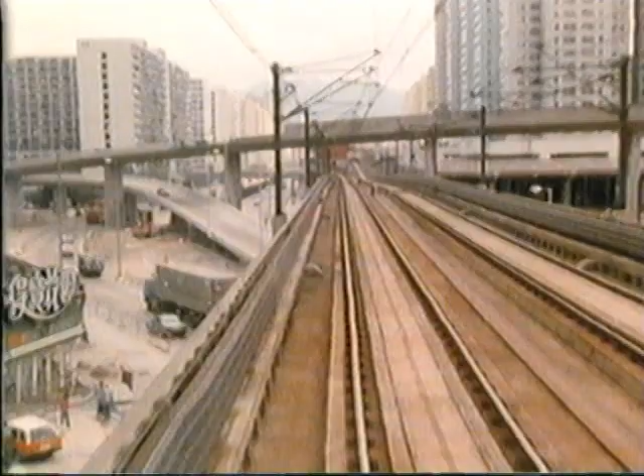This railway is considered one of the most efficient and up-to-date of its kind in the world. It moves more than 1 million people a day over a 26-kilometre track above and below one of the world's most congested cities.

For the people of Hong Kong, the mass transit railway has become an unparalleled asset. Journeys that used to take hours now only take minutes, and at affordable prices.

Commencing construction in 1975, the initial system stretched some 15.5 kilometres linking Hong Kong Island with the Kowloon Peninsula. But because of the territory's rapid expansion, this was lengthened to include an extension of some 10 kilometres. Then, in mid-1981, work commenced on the new Island Line.

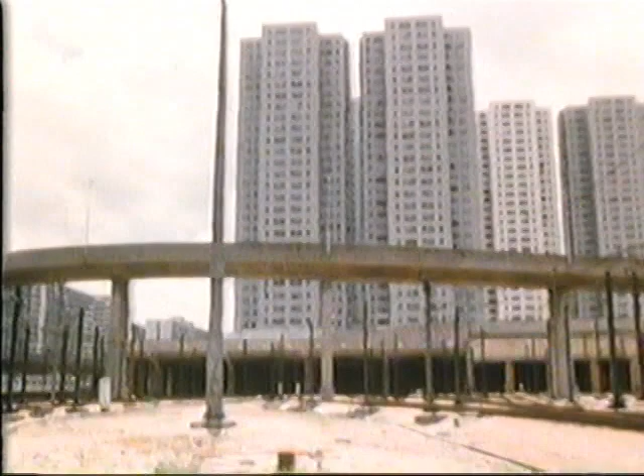One of the key elements in the railway's inception was that it should be financially viable, and to implement this, commercial complexes were established at key points along the line, one of these being the Kowloon Bay development, Telford Gardens. Numerous high-rise apartment buildings were erected, these being offered for sale with attractive incentives. This complex also houses some 100 shops, restaurants and recreational facilities, and has blossomed into a mini-city.

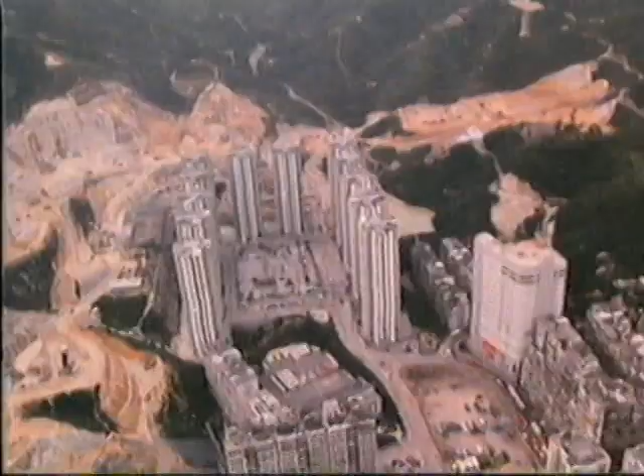This commercialization has been one of the railway's cornerstones for success, and the MTR has in a few short years become a veritable industry, what with its huge land development programs and smaller spin-offs such as station billboard advertising.

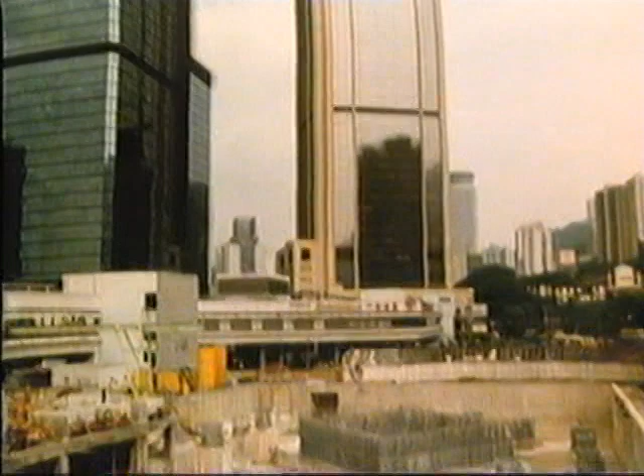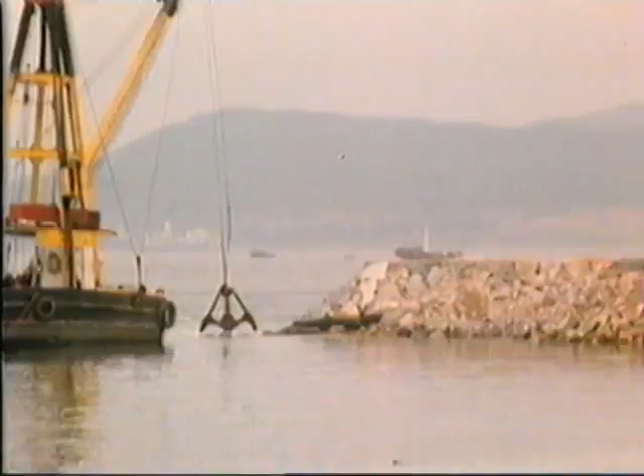While the mass transit was opening, the British company of Marples Ridgeway was establishing its presence in the territory. Their first contract was a bridge linking Kai Tak Airport and a hotel complex. The company then went on to complete foundation and advanced tunnelling work on the Admiralty Station complex, this being for a future high-rise development. And on the new Island Line, Marples excavated over 1 million tons of rock from a hillside, the fill being used for a land reclamation project.

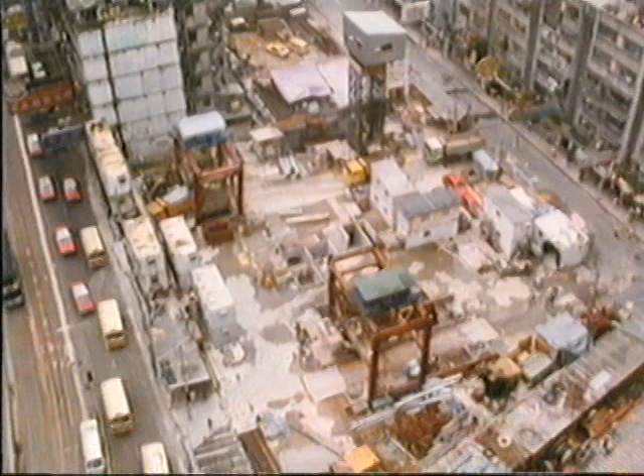Perhaps one of the most important associations Marples has had with Hong Kong's new Island Line is Causeway Bay Station, or Contract 430, tenders for this being invited in early 1982. Marples joined forces with LTA, the international construction consortium with extensive mining experience, and was successful in tendering for this contract. Not only was Contract 430 a complex civil engineering undertaking, but it had a very pressing completion date and liquidated damage clauses.

Both diaphragm and caisson walls were necessary around the periphery of the site, and within, 42 large diameter caissons containing the columns upon which the development would be erected. A road also runs through the site. It consists of 7 levels of subterranean structure, and eventually 2 high-rise developments will be built above it, and when complete the entire project will have cost nearly 1 billion Hong Kong dollars.

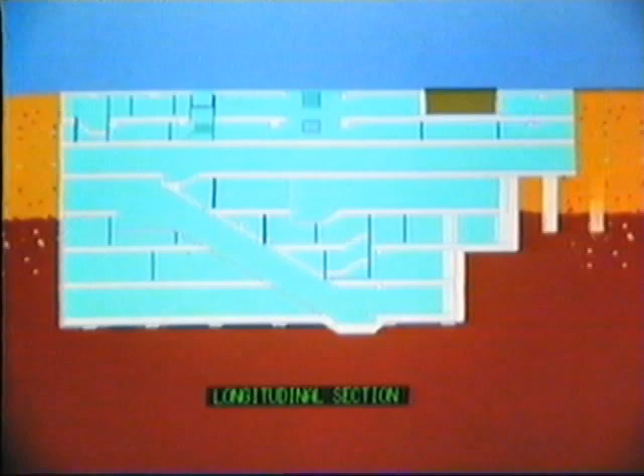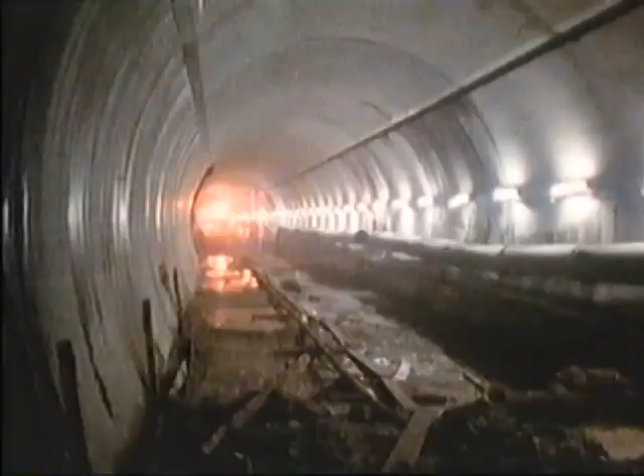The center points of the structure are large escalators to move passengers between the station tunnels below and the street level above. Also contained on the various levels are E&M and other MTR-related facilities servicing the station and running tunnels. Connection between the station tunnels and the complex is through a series of passenger adits built as part of the tunnel contract. When both Contract 430 and the tunnels are complete, they'll become an integral unit with easy access to a shopping complex and the street level above.

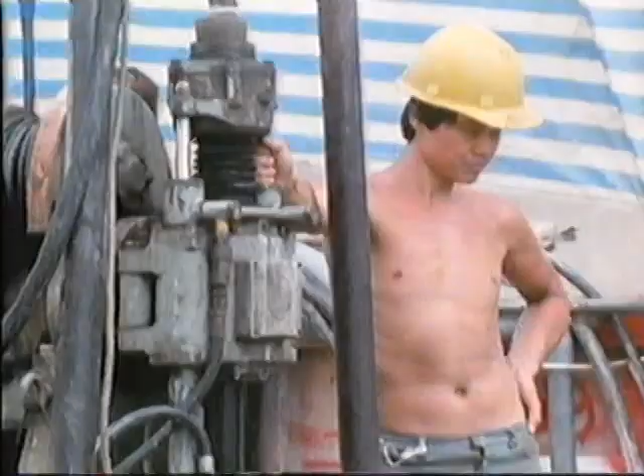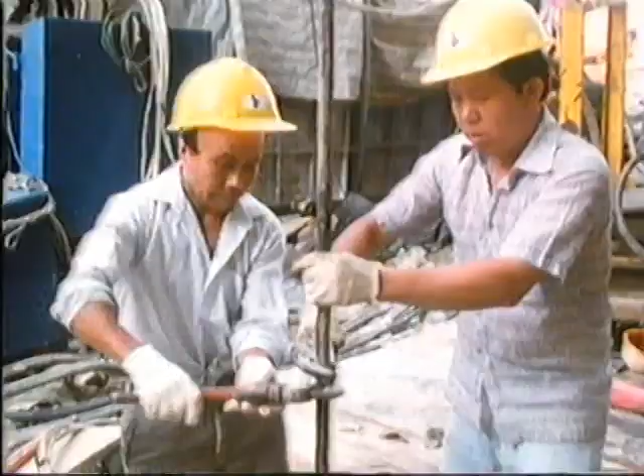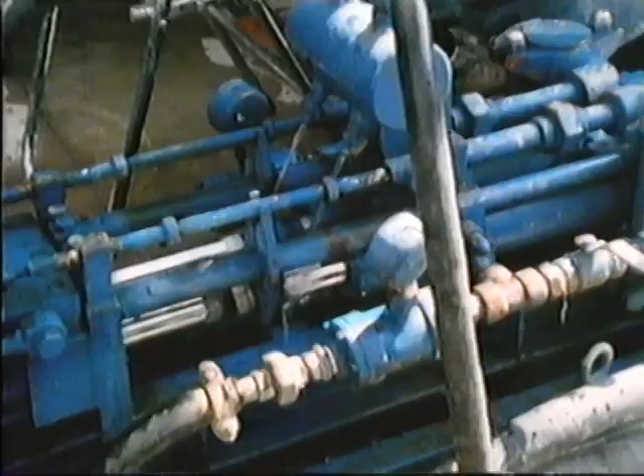The diaphragm and caisson walls were constructed first, work on these commencing in July 1982. Because of the high water table and soil conditions in the upper levels, mainly reclaimed fill, beach deposits and decomposed granite, ground treatment was necessary prior to caisson digging work. Some 1,200 grouting holes had to be drilled, and 7 million litres of chemical and bentonite cement grout pumped into the soil. Only after this was done could the caisson work begin.

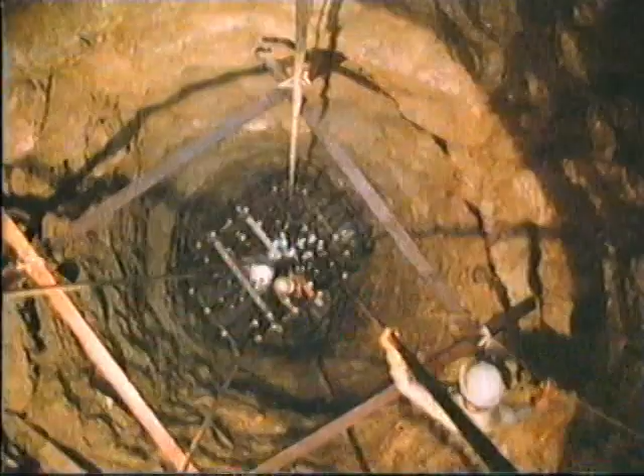The hand-dug caisson, although seldom used in other parts of the world, has become a standard construction method in Hong Kong's building industry. Essentially, a hole is dug in stages up to 1 metre deep at a time. Then supporting ring walls with reinforcement are concreted as the excavation descends. Once rock level is reached, the concrete rings are no longer necessary and conventional blasting completes the excavation.

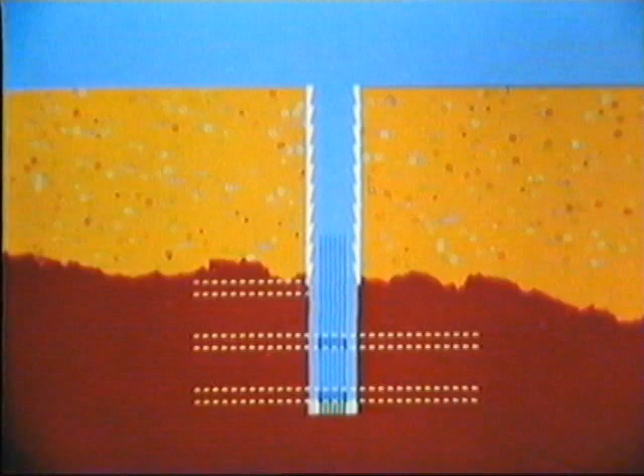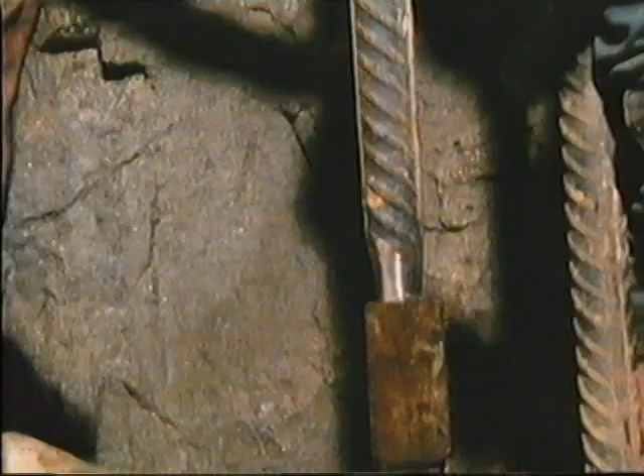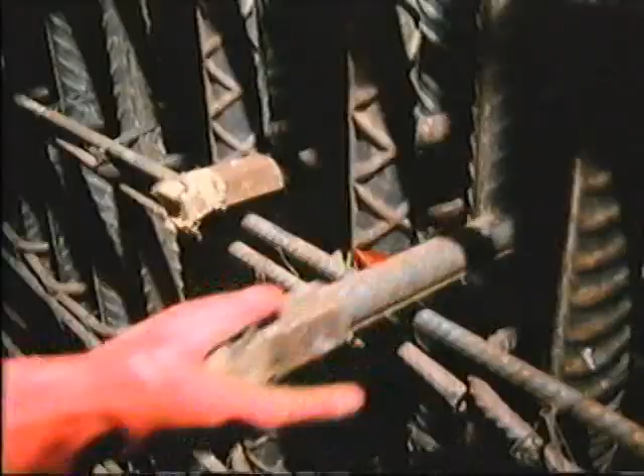At the bottom of the caisson, a base is cast upon which a cage is built with vertical as well as horizontal reinforcement, the horizontal bars later being coupled to future slab reinforcement at the various floor levels. A concrete column is then cast surrounding the reinforcement. Up to 22 tons of steel are necessary for every column, each rod of the vertical reinforcement being carefully jointed with proprietary reinforcement couplers, each being tightened to a predetermined torque value. At each floor level, horizontal bars, also with couplers, are then accurately wired in place, ready to be connected to future floor slab reinforcement.

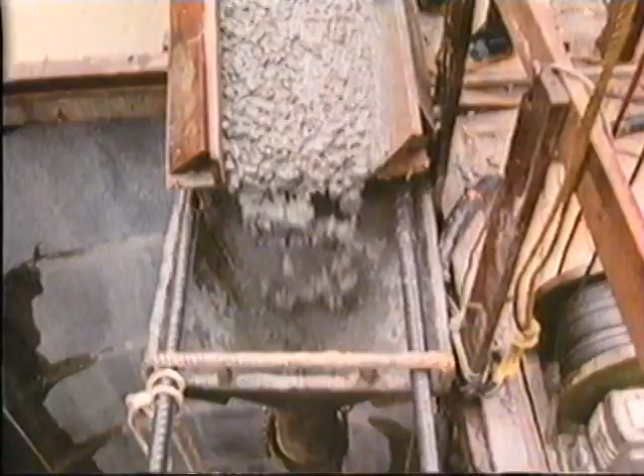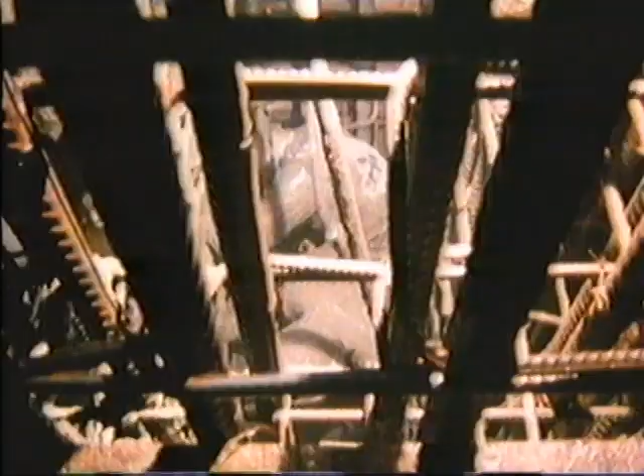Shift work was continuous throughout the caisson and column construction program, the work schedule following a carefully planned routine. Often, shuttering was completed at night in preparation for a concrete pour the following day. Hong Kong's long, hot and humid summers required the ready-mix concrete to be chilled in order to reduce heat generation in these massive sections. Heat was also a factor that should have affected the labor force, but they seemed to shrug this off, and other hardships as well. The constant dripping of water and the stifling humidity sometimes made working conditions near impossible, but the will and determination of the workers constantly surprised everybody.

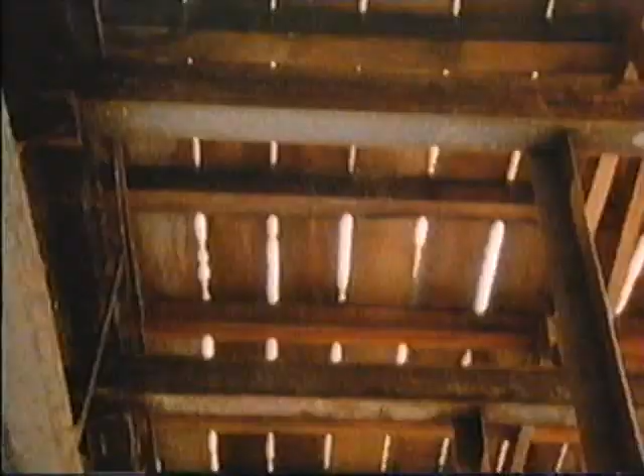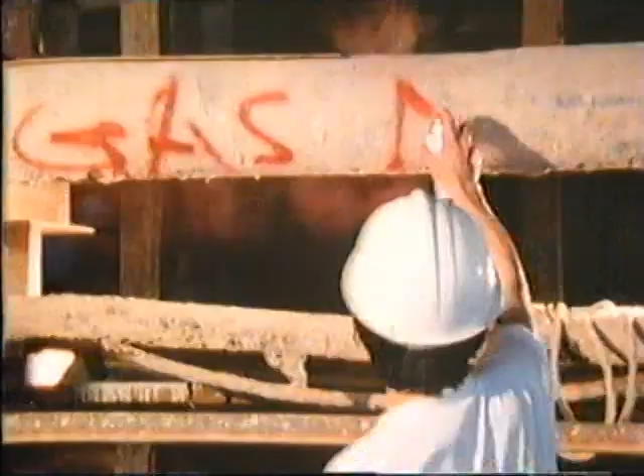A major problem facing the construction team was the road that ran through the site. All existing public utility services located underneath it had to be maintained. Extensive steelwork supports were necessary in order to preserve electricity, sewerage, telephone, gas and other services to nearby apartment blocks.

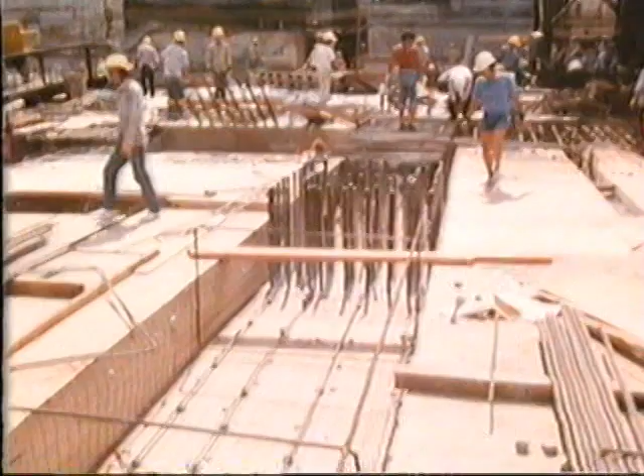Within 9 months of the start of the project, the diaphragm walls, caissons and columns were complete, and the ground floor work underway. Once again, extensive reinforcement was necessary for the heavily loaded slabs that span between columns and perimeter walls.

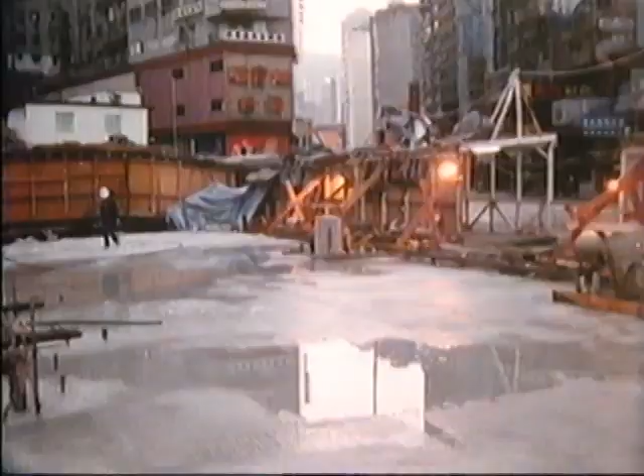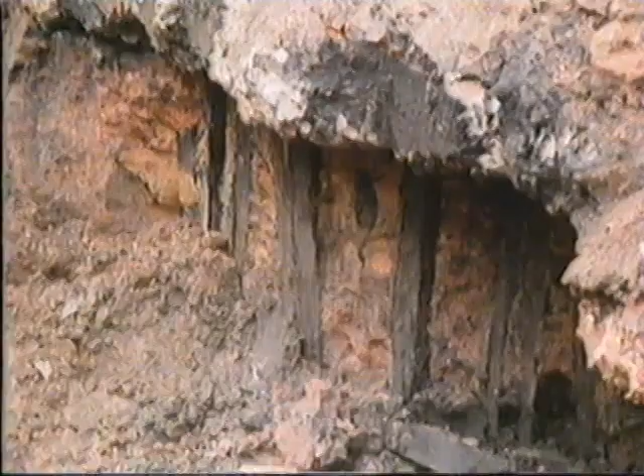With ground floor slab construction complete at one end of the site, excavators began removing soil down to first basement level. Soil conditions were extremely variable. Sand, silt, boulders, and relics of previous structures such as timber piles were often encountered. As the work progressed, excavators were lowered onto the first basement level.

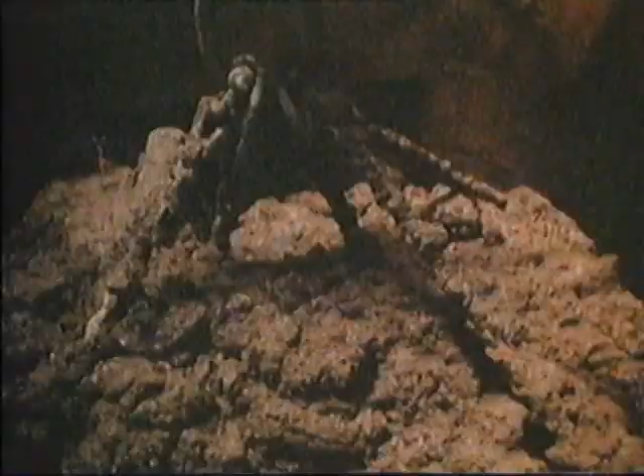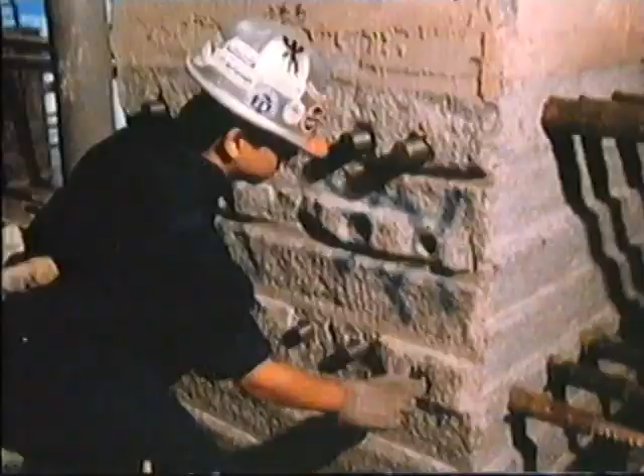Typically, each level required moving 12,500 cubic meters of soil, this being hoisted to the surface by a pair of 15-ton gantry cranes. As each floor level was reached, the slab coupler reinforcement originally cast into the columns was exposed, each section of bar in the slab being connected by threaded coupler to the horizontal column reinforcement.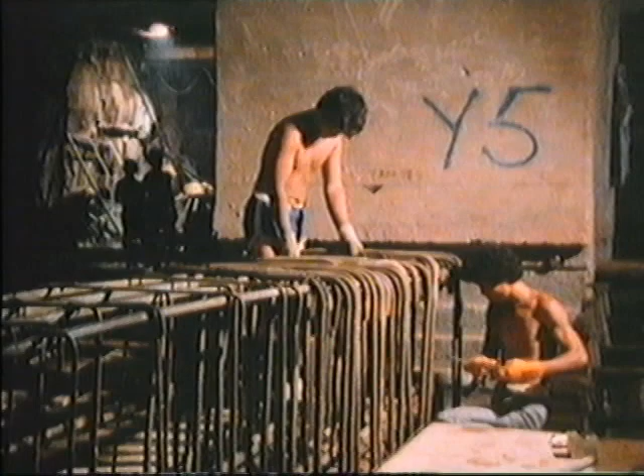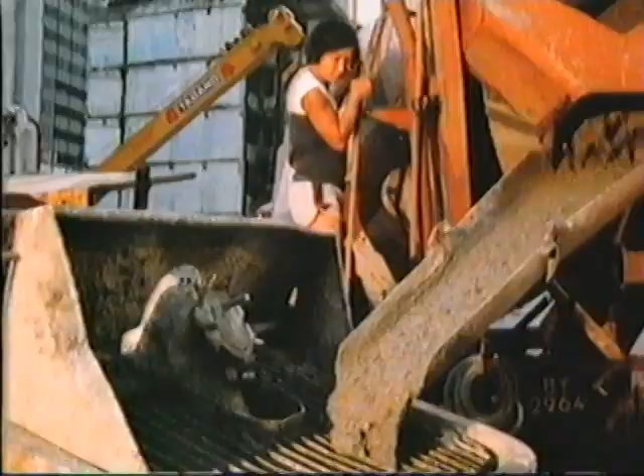Beam reinforcement cages were then assembled linking each column. Once this was done, the main floor reinforcement could be completed. The candy-striped concrete trucks became a familiar sight as they wound their way through the streets surrounding the construction site. 2,500 cubic meters of concrete was required for each basement level, and once again, extensive shift work in order to complete each floor in a cycle time of around 4 weeks.

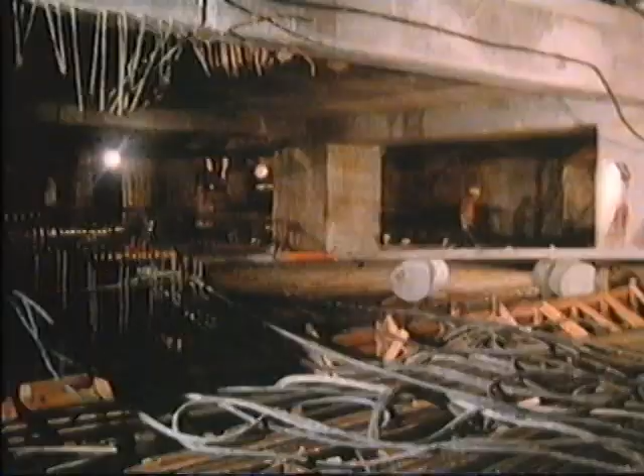More often than not, pouring was done at night, when the ambient temperature had dropped from its typical 33 degrees Celsius daytime high. Night work was not without its problems, though. Plant noise had to be taken into account, and either work had to be limited or temporary sound baffles employed.

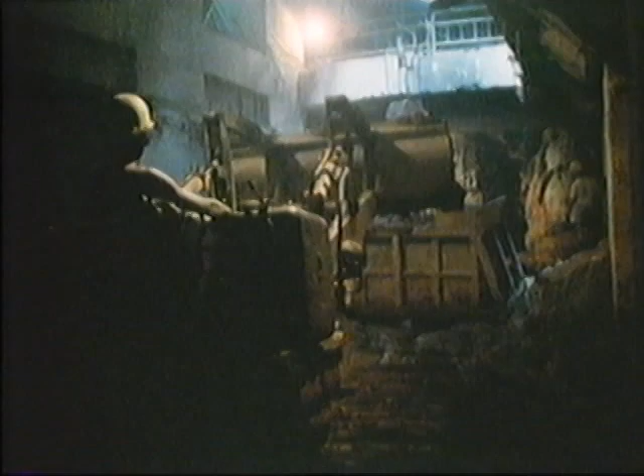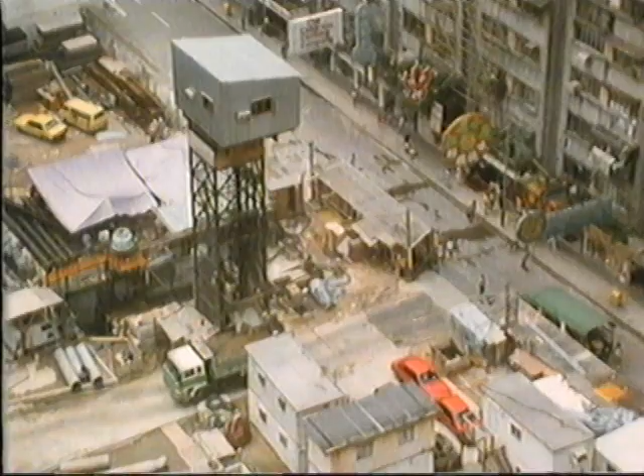The early stages of construction had shown a need to remove a large proportion of rock at lower levels in order to supplement the conventional top-down excavation. This is where the joint venture's mining expertise was called upon. The scheme required that a large diameter shaft be sunk, complete with mining headgear at the top.

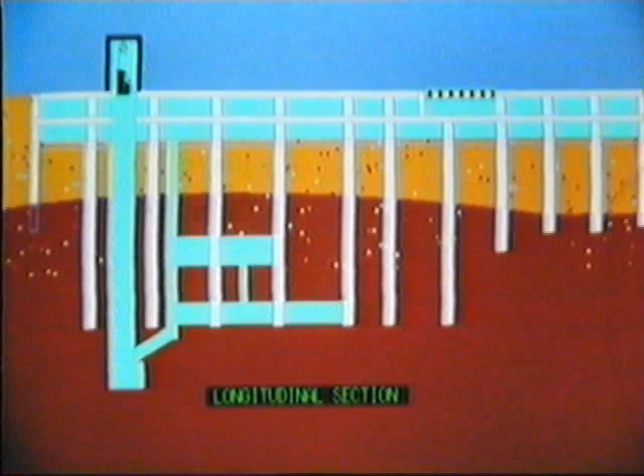Near the bottom of the shaft, 2 levels of headings were excavated, interconnected by a series of ore passes. These headings served the dual purpose of access for geological investigation and, by means of winch-operated drag lines, the horizontal transportation of rock.

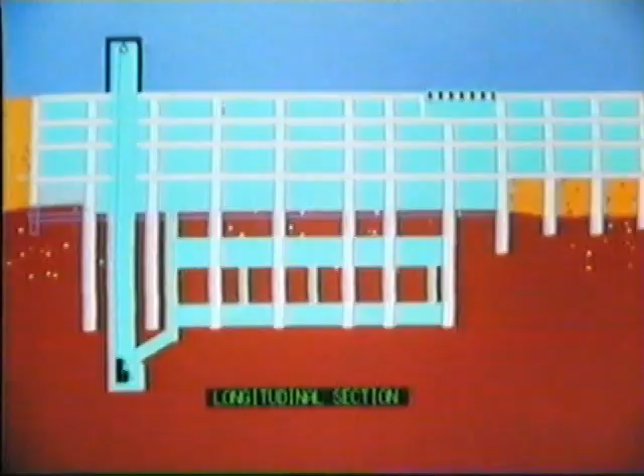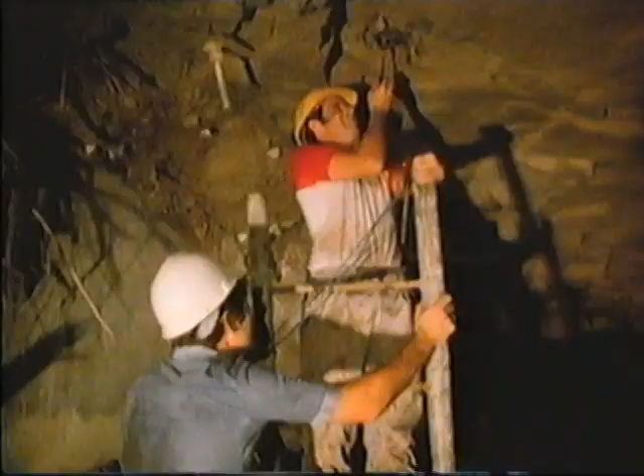From the initial development of small headings, these were enlarged into caverns by widening and deepening the upper levels until the excavation reached the lower level. This would enable approximately 9,000 cubic meters of solid rock to be removed prior to the excavation top-down reaching the cavern levels. This operation entailed leaving a 5-meter thick crown pillar of rock above the cavern. And to monitor rock movement in the roof, extensometers were installed.

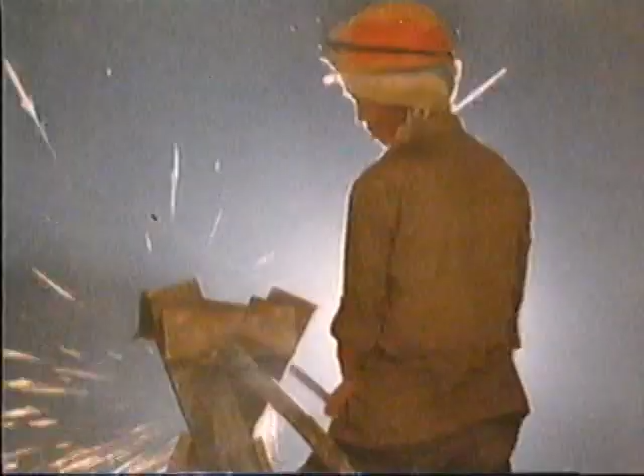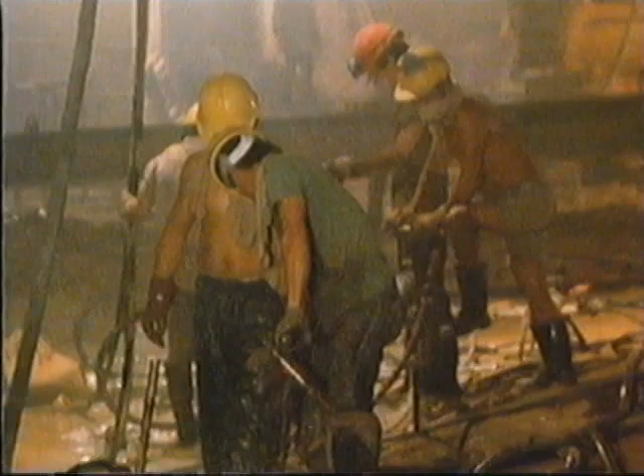Within a year of commencing work, the excavation top-down reached rock level, and new tools became necessary. Drilling into Hong Kong's hard granite became an exasperating task, slowing excavation work by half. Blasting supervision was carried out by the Marples mining specialists and MTR personnel.

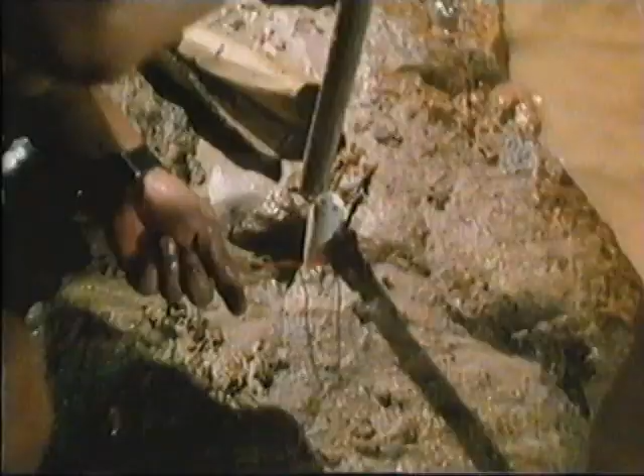Nearly 10 tons of dynamite were needed to facilitate the excavation of each lower level, the average rock haulage being some 700 tons per day. Particular care is taken when blasting the rock surrounding each column, for although the rock has to be broken up, the column itself must not be damaged.

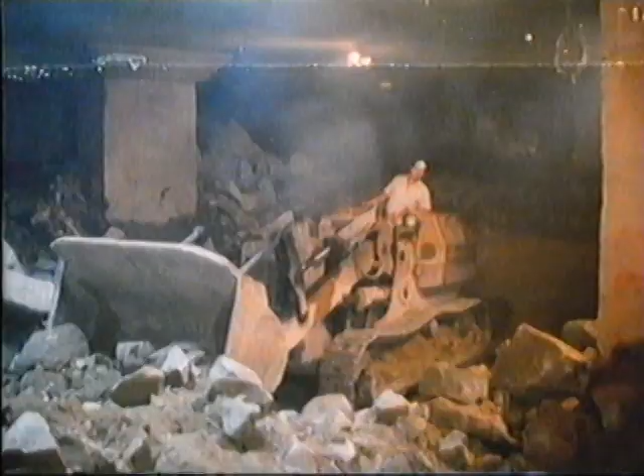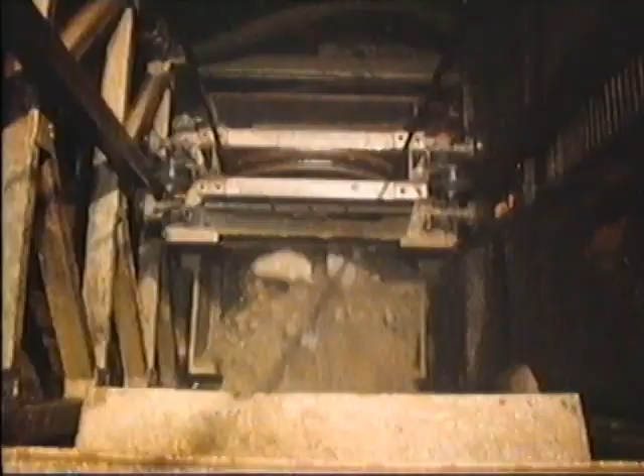The ore passes connecting with the lower caverns became particularly useful at this stage, the debris being taken down to the bottom of the shaft and then by hoist to the surface. The use of this and other typical mining techniques resulted in an additional 500 tons of granite being taken out every day.

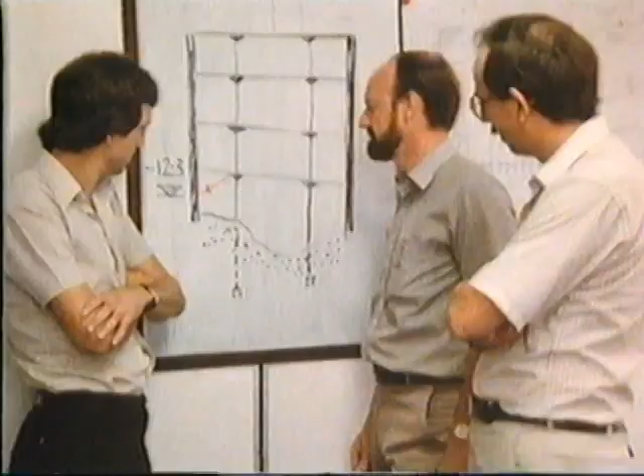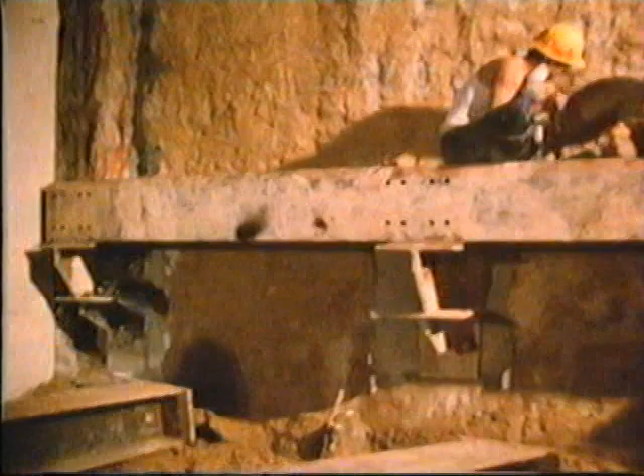Then, 16 months from the start of the project, the bottom of the diaphragm wall was reached. Rock excavation has now reached this profile. Most of the diaphragm wall required underpin extensions to reach a founding level in rock some 20 meters below ground level. But before underpinning could be started, heavy steel propping was installed to strut the base of the wall, which remained in place until the underpins were complete and an upper platform slab cast.

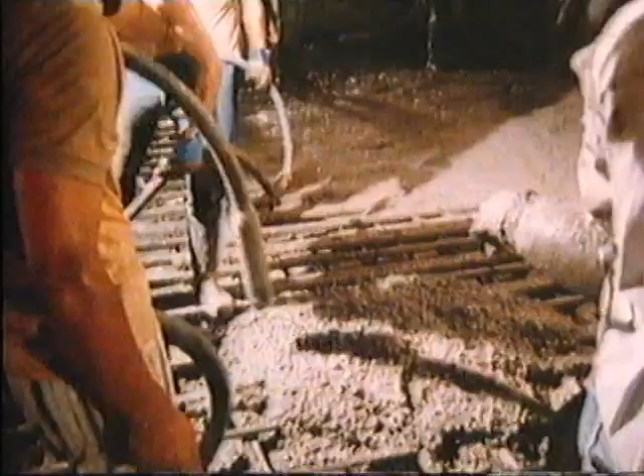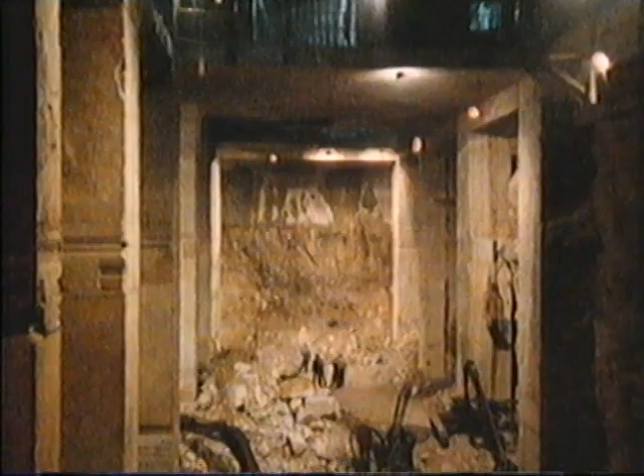After 20 months from the start of the project, the last 3 basement levels were completed, having been blasted out in a continuous operation, leaving a huge cavern some 35 meters below ground level. This was a sight that gladdened the hearts of all those concerned. The most difficult part was over. Just one major blast remained.

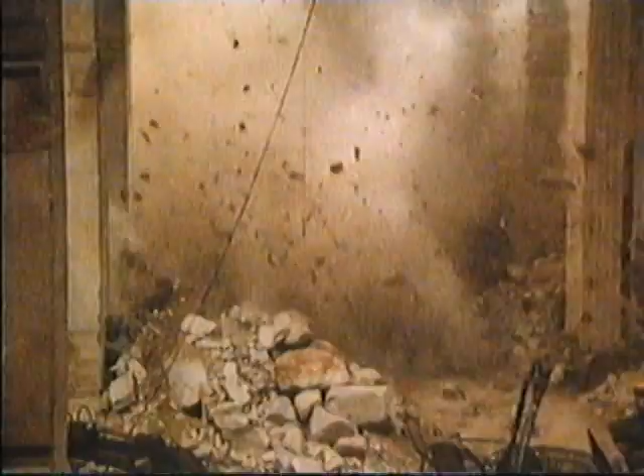The breakthrough into the tunnels was achieved 30 days ahead of schedule. For the men who had worked so hard on the venture, there remains just about the only major conventional construction in the entire project, forming the lower 3 slab levels from the bottom up. Also a year of finishing work, a year of terrazzo tiling, painting and plastering, drainage and plumbing.

But also a year to consider what 7 Down had become for many of the engineers. One of the most challenging projects in their careers. And for Marples International, a unique opportunity to contribute to the development and prosperity of one of the most exciting cities in the world.